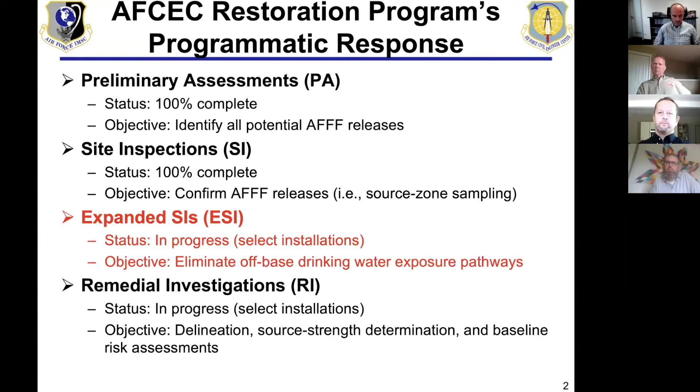We're starting RIs this year. That'll be a long protracted exercise. Stay tuned for that. But I want to elaborate a bit on these ESIs. So next slide, Sarah. Specifically to respond to your question, Gorm, this is sort of the presumed issue out there. Every one of our installations has at least one source zone, if not multiple source zones. And in some cases, those are fairly large dilute groundwater plumes that we currently are aware of. We're not at the point where we can say much about what those plumes look like. We haven't done the characterization work, but in most instances, there is a downgradient residential population, and where these residences are presumably impacted, we are taking efforts to mitigate those exposures.

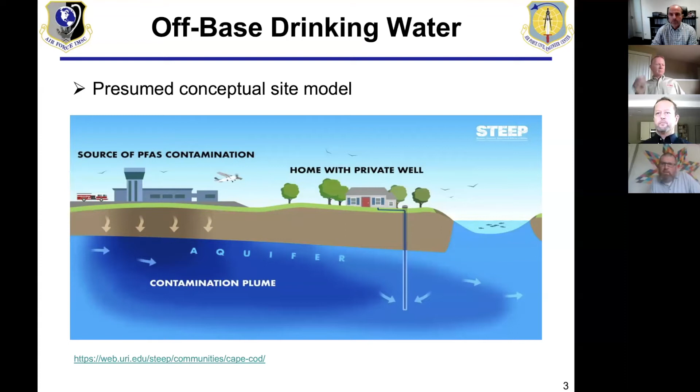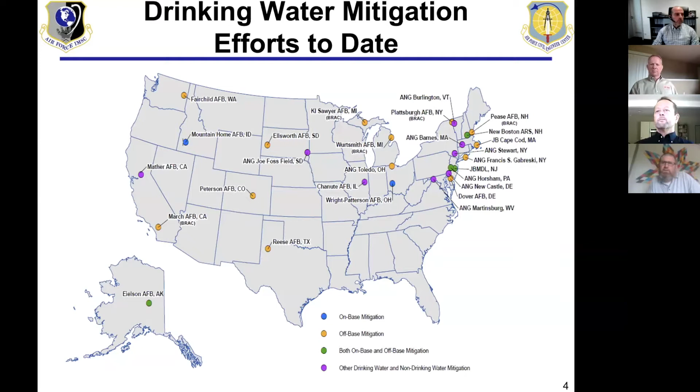Next slide. And then the final thing I want to say here with regard to this sort of prelude before we get to more detailed type questions is, our primary focus is on PFOS and PFOA, of course, because of the lifetime health advisories and the target we have for cleanup. But in reality, every single one of these sites is a really complicated mixture of vast combinations of PFAS, like Corin was saying. And I'm not convinced that all of these are necessarily problematic,

but the real world reality is you have to be cognizant of these mixtures in order to make meaningful designs, and the fact that the performance of these sorbent materials is confounded by the fact that there's other constituents in the water stream that are contributing to the loading of those materials. And if you're not mindful of that and how you design and develop a strategy for your response, it's likely going to be a bit underperforming in terms of the observed breakthrough from what's anticipated.

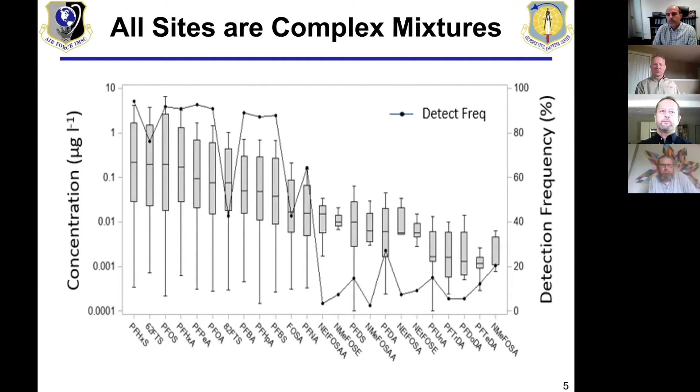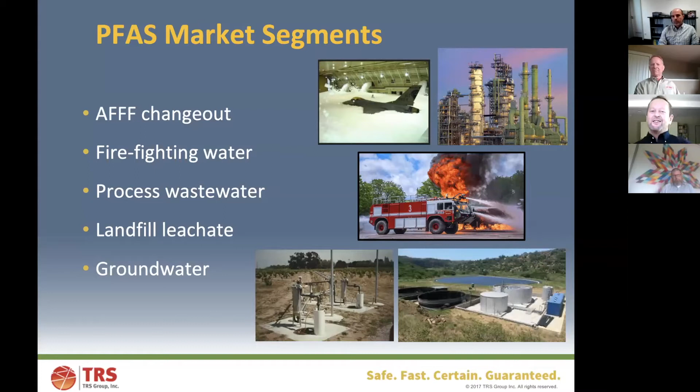All right. So that sounds like some pretty nasty water that you're talking about, pretty landfill leachate and other waste streams with probably high dissolved organic carbon, different pHs and all that. Martin, we know that you have a product called PerfluorAd. Can you please tell us how that works?

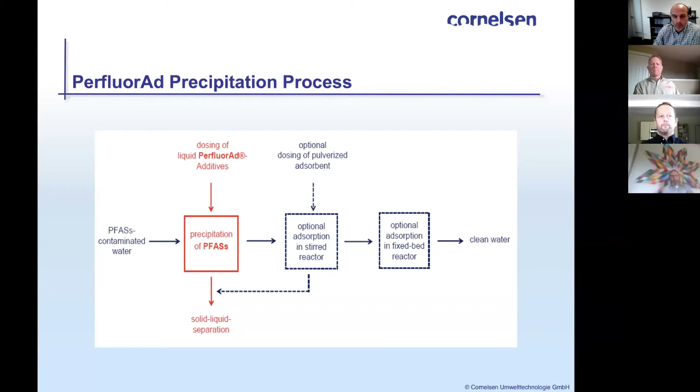We dose the active liquid ingredient, the PerfluorAd material, directly in the water stream and build precipitation products in the water. That means we create bonding between the anionic surfactant, that means a negatively charged PFAS molecule, and the positively charged PerfluorAd molecule. Next slide, please. And this bonding leads to a change in the solubility behavior of the formerly dissolved PFAS molecule. That means we build microflocs. And these microflocs we can easily treat by the use of conventional filter methods like sedimentation processes or bag filters. And very often we use sand filters to filter out these flocs. Next, please.

And I'd like to mention that the ionic bond between the PFAS and the PerfluorAd is just a weak ionic bond. And it's definitely not a chemical reaction which could form a fluoroorganic transformation product. There is no risk of this kind of formation. Next, please.

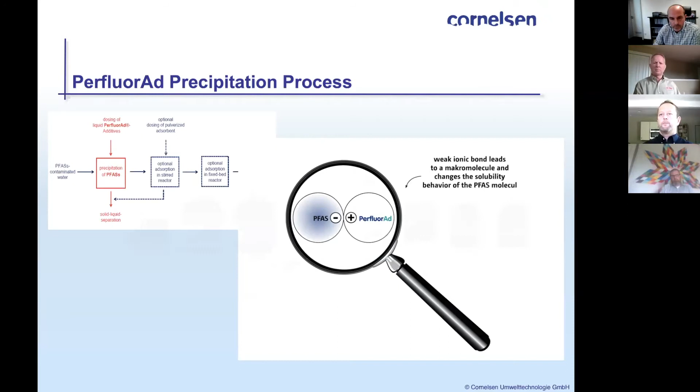Thank you very much. So Hunter, this cannot be the only effective method for PFAS in water. What else are we looking at in the R&D world for this? Yeah. So next slide, Sarah.

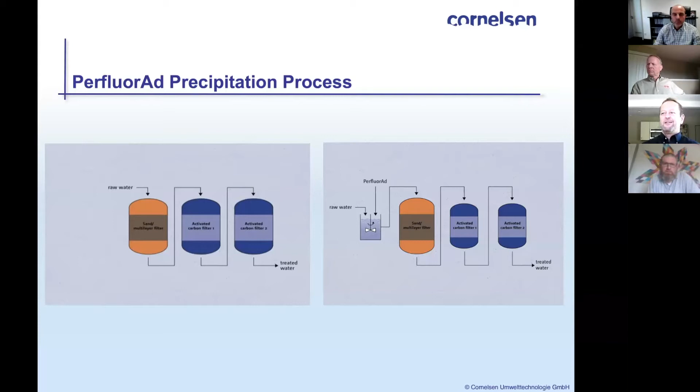So in addition to my day job as technical support for AFCEC, I also wear a research hat upon occasion and provide Air Force representation to the SERDP and ESTCP programs for the DoD. For those of you that aren't aware of these two programs, they're basically DoD's R&D arm, a $100+ million a year program across several different functional areas. But specific to restoration, we've been funding PFAS cleanup technology research for several years now, and the number and breadth of the projects are far too expansive to list here. But suffice it to say, they're really relegated into these three categories.

We've invested a tremendous amount of money into the development of all kinds of different novel sorbents. Again, too many to list here, but organoclays, engineered silicas, all kinds of various polymers that people can manufacture specifically to capitalize on these PFAS-specific properties, like Martin mentioned with respect to precipitation: the ionic fraction as well as the hydrophobic fraction, the size of the molecules, all of that plays into how these sorbents work. A lot of that work is underway. Not a whole lot of it has evolved to commercial maturity at this point, but a lot of work is in the pipeline.

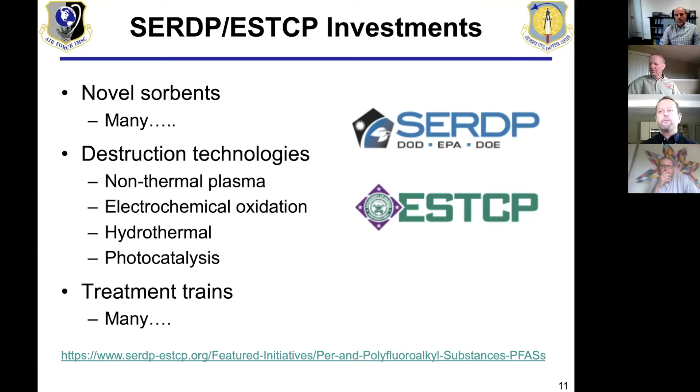And then a question for David. Going back to the PerfluorAd application, can you give us an overview of the niche applications we see for that? What types of water streams is it best for? Sure, of course. Sarah, could you advance to the next slide, please? Number 12. So the niche applications for PerfluorAd include high PFAS concentrations, and we're talking about 50 micrograms per liter total PFAS and higher.

However, there has been recent data generated from some laboratory bench studies from an industrial process manufacturing facility that showed very low initial concentrations in the double parts per trillion concentration range, and PerfluorAd was very effective at reducing those by 99%. So typically the technology is for the higher concentrations, and also dissolved organic carbon: if you have high dissolved organic carbon in your water, it doesn't interfere with PerfluorAd. So that's one of the advantages of PerfluorAd.

And then firefighting systems, as I mentioned earlier. This is a niche we're exploring more in the US. It's been proven in Germany many times by cleaning out firefighting trucks with the PerfluorAd system. Very effective at getting the PFAS and the AFFF out of the firefighting truck. Next slide, please, Sarah.

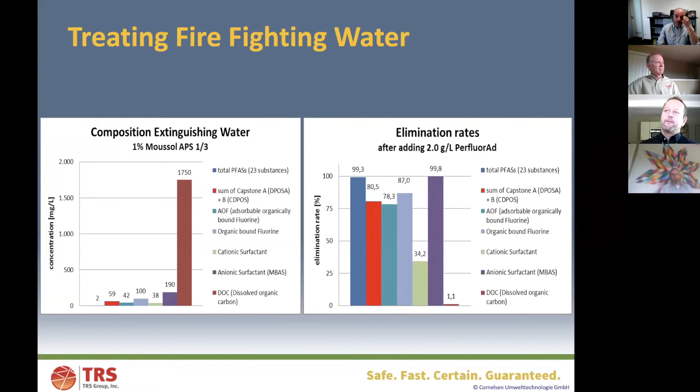Thank you so much. Martin, we know you have had a head start on this in Germany. Can you please show us some of the projects or some examples of PerfluorAd applications so we can get a feel for what it looks like?

Yeah, sure. Before I show you a concrete example, I would like to show you a map with the project references in Germany, Netherlands, and Luxembourg that have been worked out so far. There are almost 20 projects that we have implemented with PerfluorAd since the market launch in 2015. Just to mention it.

As I mentioned earlier, the PerfluorAd process has been developed for the treatment of water containing high PFAS loads and/or high DOC contents. This is not to say that this process cannot be used for low PFAS loads, but the technical efficiency and the cost advantages of this process are shown especially in highly contaminated waters. That's important to understand. Such as landfill leachate waters, David already mentioned this, heavily polluted groundwaters, as well as industrial wastewater with high organic contents, firefighting water, and several more.

I cannot show you project examples for every kind of water I mentioned before, but I'd like to highlight an application case which is currently of great relevance in Germany. This is the use of the PerfluorAd technology for the cleaning of PFAS contaminated firefighting trucks. Next, please.

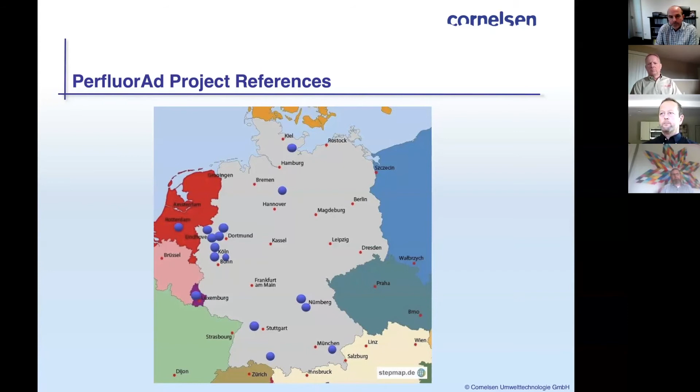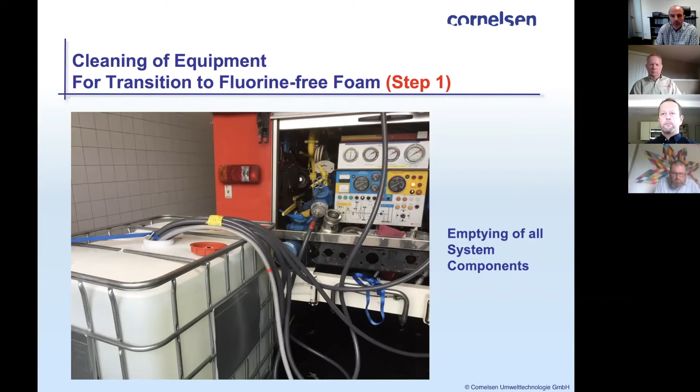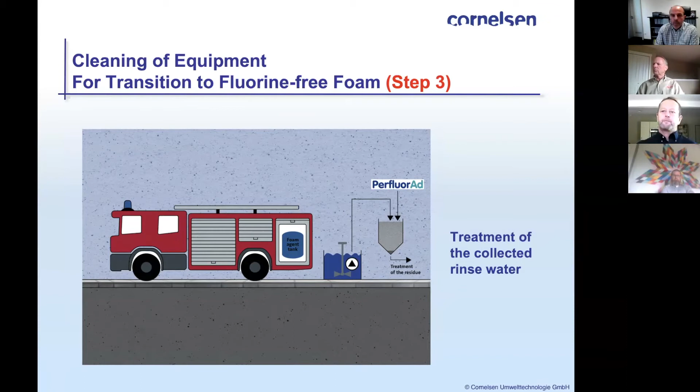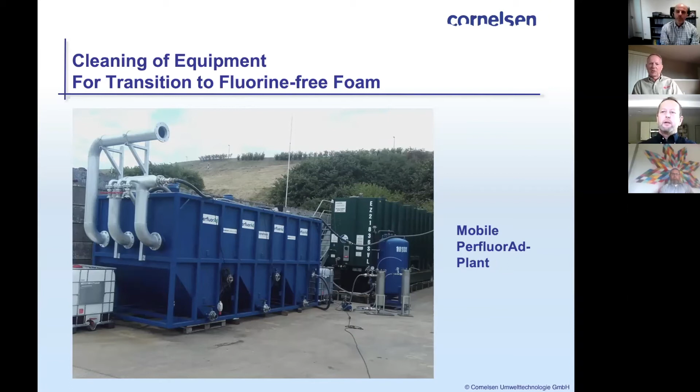Is this technology available in the US? We saw like 18, 19 dots on the German map, but what about over here? Yeah, so, Sarah, could you advance to the next slide? That's number 19. So TRS is the provider of PerfluorAd in the United States. And what's available are bench studies. We're doing laboratory bench studies. And that's important in order to understand the chemistry of the water, as well as identifying the ideal dosing rate of PerfluorAd based on that water chemistry, including the PFAS concentrations, to create the best reduction of PFAS in the water. So that's on the bench scale side of things.

And we're doing those in Germany. We're using Cornelsen's vast experience to help us really perform these studies. We feel like that's the best way to do this. So many customers we're working with provide samples over to the Cornelsen lab in Essen, Germany, to perform these laboratory bench studies. And then Cornelsen is building a pilot test system for the US market that we're expecting to be delivered early this fall. And that pilot test system comprises 4 Conex boxes that are each 20 feet long. They'll be shipped on a tractor trailer. 2 trucks come in shipping these components.

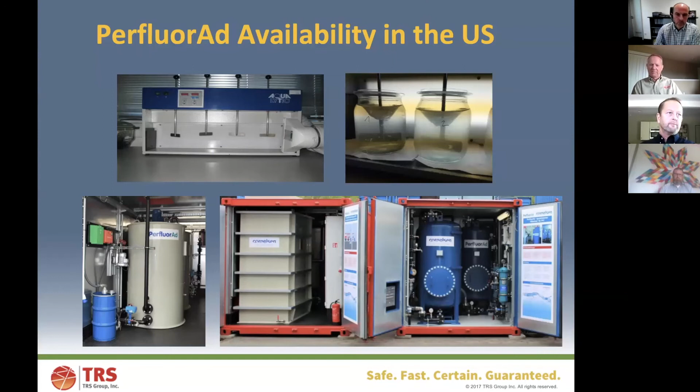Thank you very much. And we have one more canned question, if you will, before we open it up to Q&A from the panel there, or from everyone who's written. And this is for Hunter. So what is probably the most difficult question of the day? So there's 4,000 or 5,000 different PFAS molecules. Which ones are we targeting, and what's the implication of us finding new molecules all the time? And of course, a lot of people think about the shorter chain PFAS molecules that are now being added to the mix. Do you have any thoughts on that?

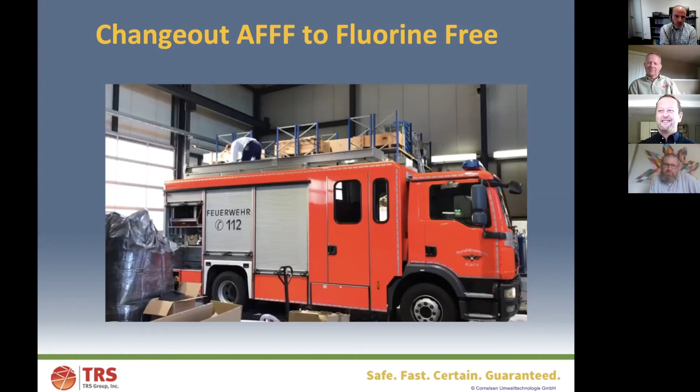Yeah, sure. That is quite a loaded question. Sarah, if you go to the next slide. So as I indicated previously, each one of these AFFF impacted sites is truly a mixture. And I think that's going to stand across the world in terms of all the various sources of PFAS emissions, whether it be from manufacturing, what have you. But very rarely are you going to have a situation where there's a few PFAS to manage. Usually it's these really complicated mixtures in very different quantities and compositions across the sites.

And the question does come up when we build these systems. It's one thing to target the long chain perfluorinated compounds like PFOA and PFOS that are relatively easily removed by adsorption and things like precipitation. But it's another thing altogether to start talking about removal of the short chain species. And again, I'm not convinced that they're all necessarily problematic, but these questions come up in the interim as we're designing this system. To what extent are you going to prescribe long-term O&M to be inclusive of these short chain compounds?

To kind of answer that question, we partnered with the EPA not too long ago, some folks in Cincinnati at the Office of Research and Development, who have built and managed their online drinking water treatability module to now include PFAS. We can model the breakthrough of different simulated systems across a range of different scenarios, site conditions. So we've done this little desktop exercise and illustrated that relative to just being inclusive of PFOA and PFOS at the LHA, meaning when we prescribe media changeouts when we observe breakthrough at the LHA, if we alternatively prescribe changeouts at any detectable PFOS or PFOA versus any detectable PFAS, we see upwards of orders of magnitude inflation in cost multipliers.

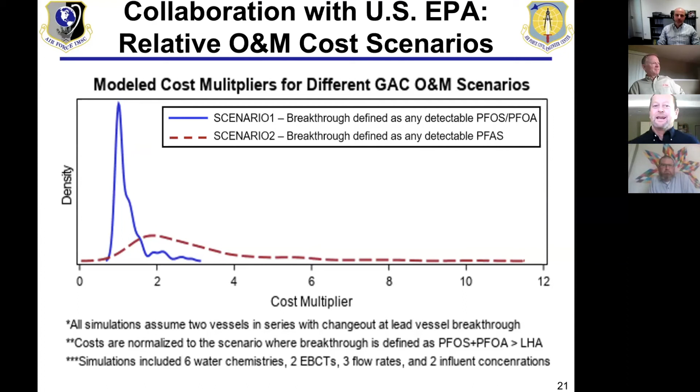But one that stood out right away, other than the one we just addressed on what happens to the waste, was on PerfluorAd as well, and whether it works on landfill leachate. We did show that in an overview slide, but do we have any data to back up that we can actually treat these low levels of PFAS in landfill leachate? Yes, if you go to the next slide, Sarah, there's a good description of the landfill leachate, Martin, that maybe you want to address. Yeah, it's just an example for a treatment of a landfill leachate.

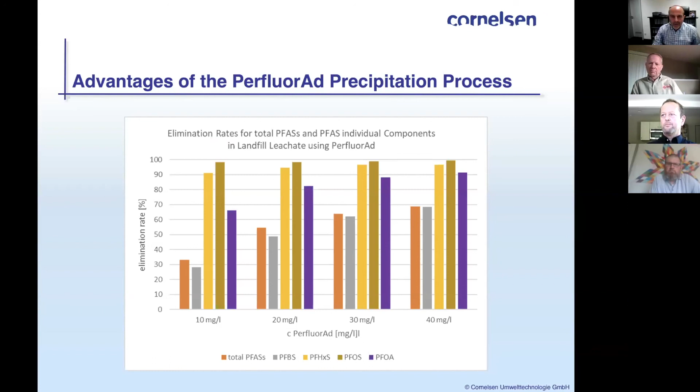Yeah. Dora put in a question concerning biodegradation of PerfluorAd. Maybe we can pick up this question from Dora now in this context. Yes. Hello, Dora.

Like David mentioned before, it was very important to me to develop a biodegradable active ingredient, not a hazardous one, to solve the PFAS problem. So it's important that we separate the built PFAS PerfluorAd flock from the water treatment system after the flock building process is finalized. That means we separate the flock from the water, and then it doesn't matter that the biodegradation process of the PerfluorAd starts and the PFAS is released,

because we have separated the flocks in a very small volume. And this volume we want to treat by discharge or disposal in a high temperature incinerator plant, or the use of other electrochemical methods or whatever. So to answer the question, we separate the flock, and if the biodegradation process starts, it doesn't matter there.

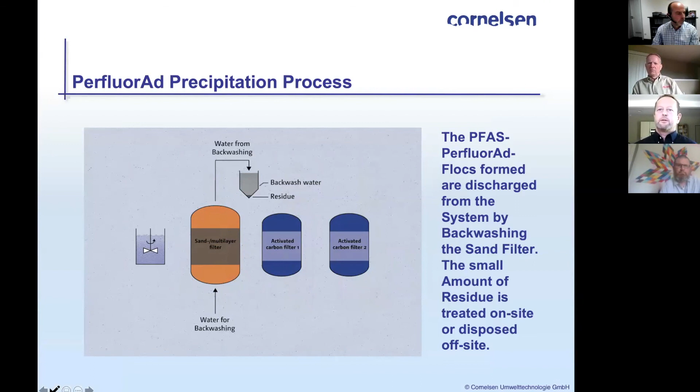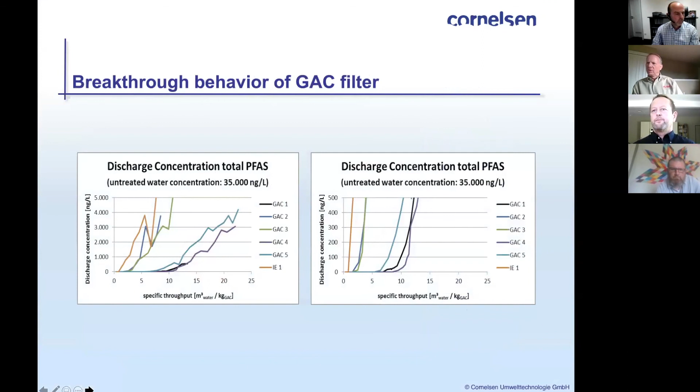We also had a question on cost. What is the cost to treat 1,000 gallons? I know that's a very difficult question because it completely depends on scale. I think we will refrain from opening that can of worms on this webinar, and maybe there'll be some other chance to talk about it.

There's no doubt that if all we have as best available technology is just activated carbon, then we are going to be building some enormous treatment plants that will use a lot of granular activated carbon and create a whole lot of waste with PFAS in it for destruction, and we're all working hard to find ways to lower that cost, because that's not a fun thing for Hunter and his colleagues to think about having to do at all these sites, right? Building these 10, 100, 1,000 gallon per minute systems that will have to run forever, with carbon being spent quickly.